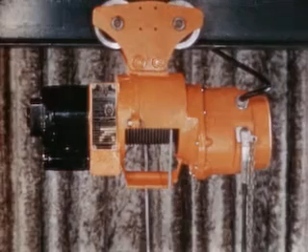Electric hoist. An electric hoist of such strength, ruggedness, and quality that its superiority speaks for itself. Did I hear somebody mention my name? Hiya, fellas. Oh, you're surprised to hear me speak. Well, they said I could do everything but talk, so I decided I'd try that too. Load King is my name, one of the Yale boys.

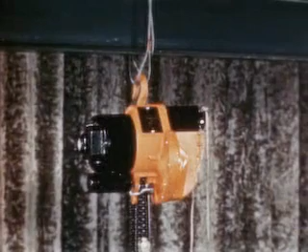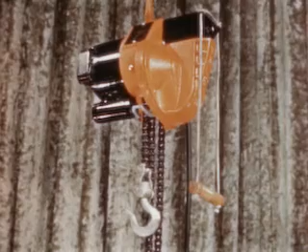This is my little brother, Midget King. For his size, the toughest, hardest working little electric hoist in the neighborhood. Capacity-wise, the Midget King and I are fairly alike. He has a slightly wider range of tonnage, but I'm more adaptable to more applications.

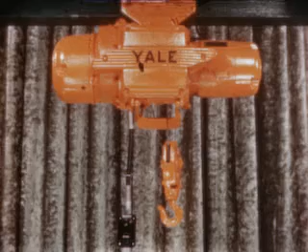And, of course, you all know my big brother. Now, he's the powerful, dependable Cable King, the mainstay of thousands of production lines. I get my looks and strength from the Cable King side of the family. You see, I sort of round out the Yale Hoist family. I handle loads up to a ton. I'm an extra husky wire rope job, and I carry a price tag you can look at and grin.

Now, I'd like to point out to you some of my special features. But while I can talk, I can't point. So I'll call on my assistant, Miss Queen, to help point out to you my features and fixtures.

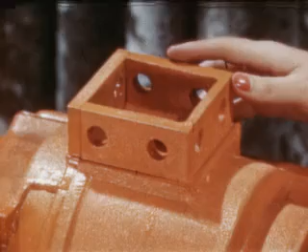Basically, I start out as an ordinary lug type. Queenie, show them my lug. What a funny kind of lug you have, L.K. Why, you have a square head. Sure, Queenie, but this kind of lug design makes me adaptable to all kinds of installations. After all, how do we know where I'll be needed a year from now?

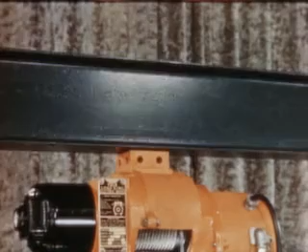For example, maybe I'll do the job best hung from a permanent structure, like an I-beam. Or else, I can be suspended by a top swivel hook from a chain or cable over a beam. I often work this way as a maintenance tool. Then, when they want me to carry a load around, I quickly adapt to a plain trolley. And notice how I can be put at right angles to the track or parallel to it, whichever you need.

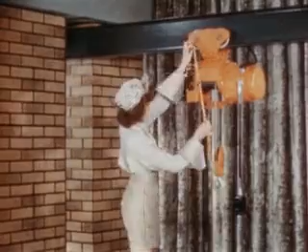As for size, take a look at my overall dimensions. I average only 21 inches high and only 14 inches wide, which means that in spite of my strength, I can squeeze into tight spots or get close to walls.

Now, to let you in on something, I'm going to strip down and show you how well I'm built. Queenie, I'm really put together. You don't have a thing on me. And just what do you mean by that remark, L.K.? Well, take a look at my frame. Plenty of toughness in that armor of steel.

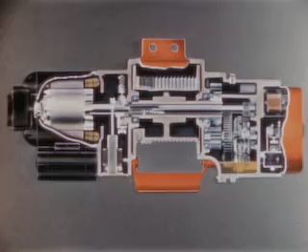Oh, wow. And did you know my motor is especially designed for hoist duty? Yep. Rated in accordance with NEMA specifications. In other words, under normal service, I'll lift full-rated loads without getting hot under the collar. Show them my X-ray picture, Queenie. I want them to see how the power that my motor produces is transmitted through the shaft and stepped up through 3 sets of gears.

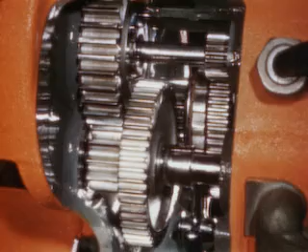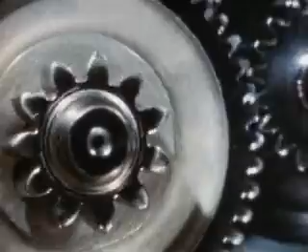You should hear my engineers boast about them. Triple reduction gear train. No overhanging pinions. Chrome nickel steel forgings. Heat treated. Hardened and ground. Individually tested for hardness, heat treatment, accuracy, form, and fit. 20-degree full-depth tooth. Straight spurs with modified involute tooth form. What they're saying is that you never saw a better set of molars than my gear teeth.

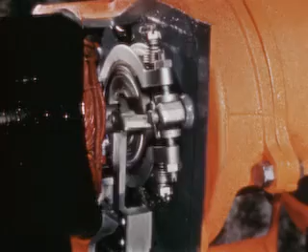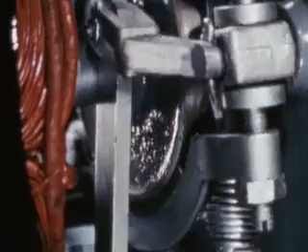Now, the brake that controls the drift of my motor is the external contracting drum type. And if it ever needs adjustment, that's easy to do. This plunger-type solenoid moves the brake shoe into braking position. While the main purpose of the motor brake is to control motor drift, my motor brake can also hold the full capacity load of the hoist. Not that it's required to, but it can, just in case.

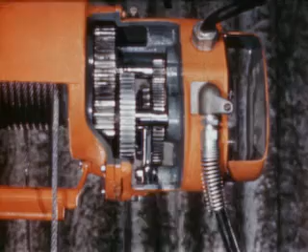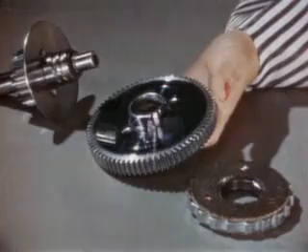Ordinarily, the automatic Weston load brake does this part of my job. And do you know it operates practically forever without adjustment? That's because it's a screw and disc type load brake. As the braking surfaces wear from contact, the screw gear automatically compensates for the wear.

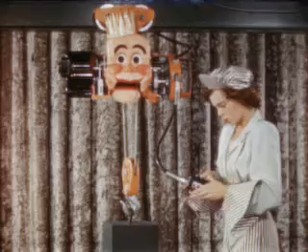Fellas, I hate to brag, but, thank you. Thank you. I hate to brag about myself, but the combination of the Weston load brake and the independently acting motor brake gives double safety. Both of these brakes of mine operate whether the power is on or off. And if the current is accidentally shut off, that load is held.

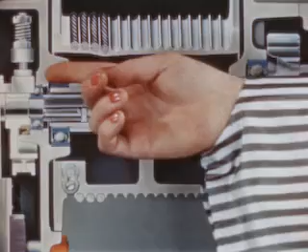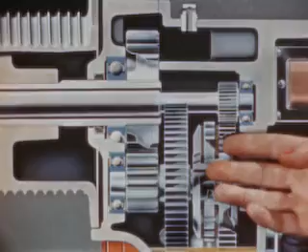Gee, LK, you're a smooth operator. I'll tell you why. I have the right kind of ball bearings in all the right places. Show 'em, Queenie. I have sealed ball bearings on my motor. My cable drum is mounted on precision ball bearings. My gear and pinion ball bearings are double shielded. And to handle thrust loads in the gear train, I have ball bearings on all high-speed gearing. And the reason I continue to run smoothly is that I'm thoroughly oiled.

Now, don't get me wrong. What I mean is that my gears and load brake operate in an oil bath. Okay, now let me show you how foolproof I am. If the operator forgets how high the hook is traveling, my upper safety limit stop does his thinking for him. Or her. As soon as the load block hits the safety paddle of...

Hey, Queenie! Queenie!

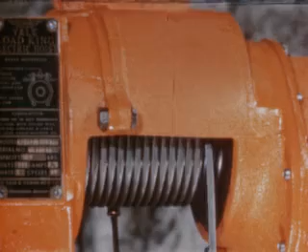Well, anyway, what really happens is it breaks the circuit and returns the controller to neutral. You see, if the load block does happen to go too far, the motor reverses for a second. My cable drum is enclosed in the hoist frame, so it's protected from the weather, guarded from mechanical abuse. Notice that the drum has machine-cut grooves so that the cable doesn't pile up and cut itself to pieces.

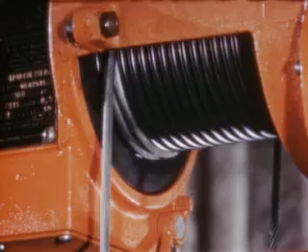That cable is anchored in my drum, like the Rock of Gibraltar. But it's easily removed when necessary. My drum can roll up cable for a 10-foot lift without overlapping. Incidentally, this steel cable is a special flexible aircraft type. And flexibility is a real advantage where there's side lift in handling a load. And fellas, do you realize that although I'm available to lift up to 2,000 pounds, it would take more than 13,000 pounds to break that cable?

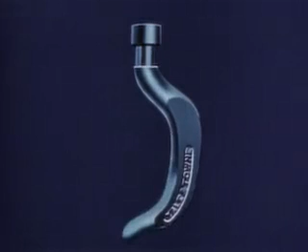But LK, tell them what you do when you're overloaded. Overloaded? Oh, yes, overloaded. My safety steel hook will stand load pressures up to 150% of its rated capacity without changing its dimensions. Then it opens slowly without fracture, before any of my other parts are strained. You see, when I'm overloaded, my safety hook gives visible warning. It's an exclusive Yale feature.

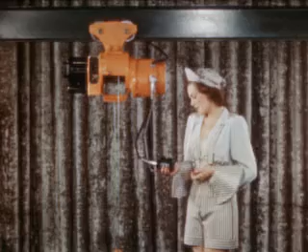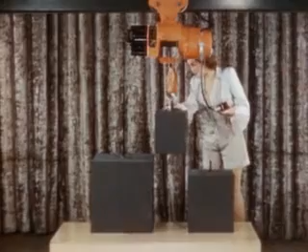Also, I'm particularly proud of my magnetic push-button control, contactor type. Automatically returns to neutral. As a safety factor, the power at the push-button station is only 115 volts, equivalent to ordinary house current. This hoist control offers two advantages. One, it makes for efficient one-hand operation. The other hand is always free to guide the load or move the hoist along the I-beam. Two, it gives a fast-acting brake that makes possible close spotting or inching of load.

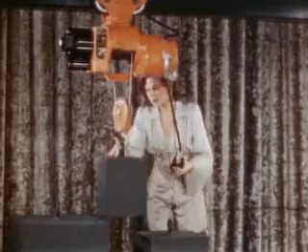And did I tell you that my Load King trolley has ball bearings, too? For easier travel along the I-beam? Just another way I save effort. Now I'd like to show you what I can do because of my strength and ruggedness. Hey, Queenie, it's my muscles and power that we're talking about.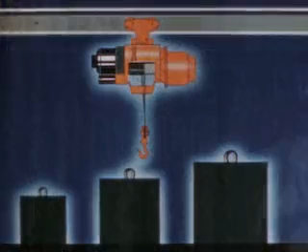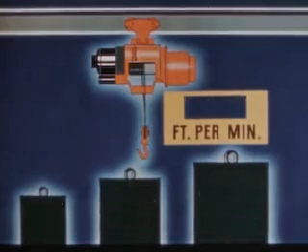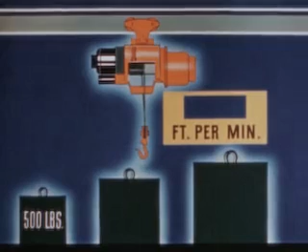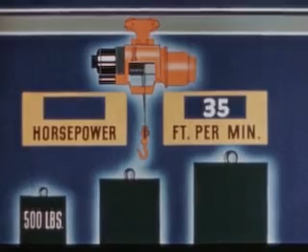I can lift anything from 1/4 of a ton up to a ton at speeds ranging from 12 to 35 feet per minute. Here's how I do it. As the speed of the lift and the weight of the load increase, I use a larger and larger horsepower motor. For loads up to 500 pounds, to be lifted at the rate of 12 feet a minute, I use a quarter horsepower. Now, if you'd like that same load to be lifted at a faster rate of, say, 35 feet per minute, I can do that too with a half horsepower motor.

The same ratio of horsepower to hoisting speed applies to the 1 or 2,000 pound hoist using a 1 horsepower motor. But what am I telling you this for when the information is in the Load King Bulletin? I don't know much about horsepower, but I must say you can lift quite a range of loads at quite a few different speeds. You seem to be a very adaptable fellow, L.K.

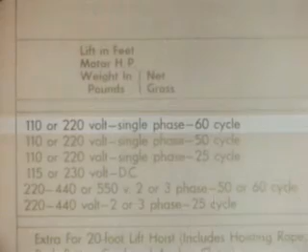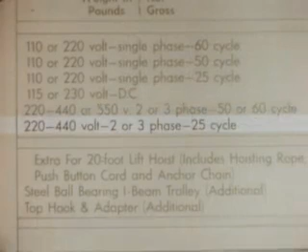Adaptable? You said it. Shall I tell them about my adaptability to all kinds of electrical power sources? Oh, you mean that business about single, double, triple phase, or direct current? Yes. If it's 110 or 220-volt single-phase current, I can work on 60-cycle, 50-cycle, or 25-cycle power. Or if you have direct current. Or if it's 2 or 3-phase power. Or even only 25-cycle power. Well, I work well on that, too.

The important thing to remember about powering your hoist is to not powder, Queenie. Power. The important thing is always to give me the power I need. Don't put me on an overloaded line, which I have to share with other guys. Say, there are lots more things I could tell you about myself, such as ease of maintenance. No, Queenie. Put down that wrench. I need very little maintenance. I'm always ready to give production a lift.

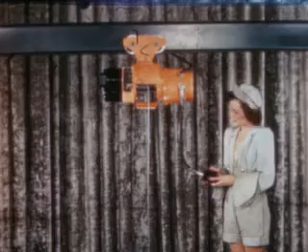But before you know it, I'll be a talking hoist that's talking his head off. Well, what do you know? I did it again. So I guess I'd better get to work. I don't need to worry, though. Lots of production men who have used me will do my talking for me. And that's our Yale Load King. There's no other wire rope electric hoist like it. Well, what do you know? A talking man.